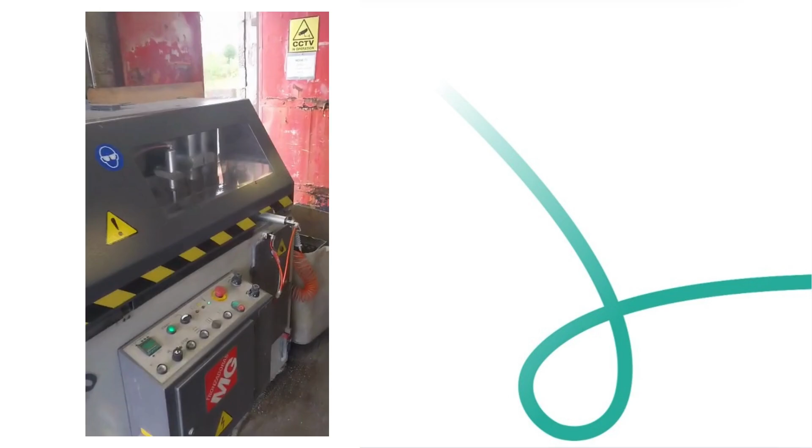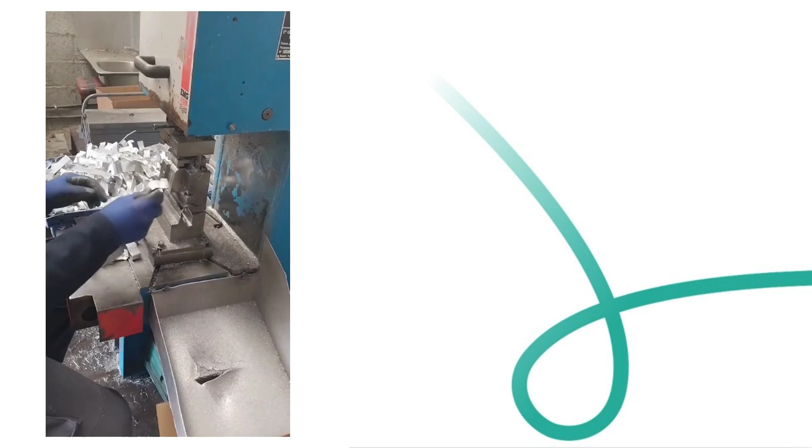The AIM team investigated the viability of automating various processes throughout the production facility and found the punching process was the most suitable application for robotic integration within the factory, as it is highly labour intensive and well suited to automation due to its repetitive and structured nature. The video illustrates the existing workflow where the bracket is initially cut and deposited into a container. This container is subsequently moved to the punching station where the brackets undergo the punching operation. The finished parts are then placed into a designated container via a chute.

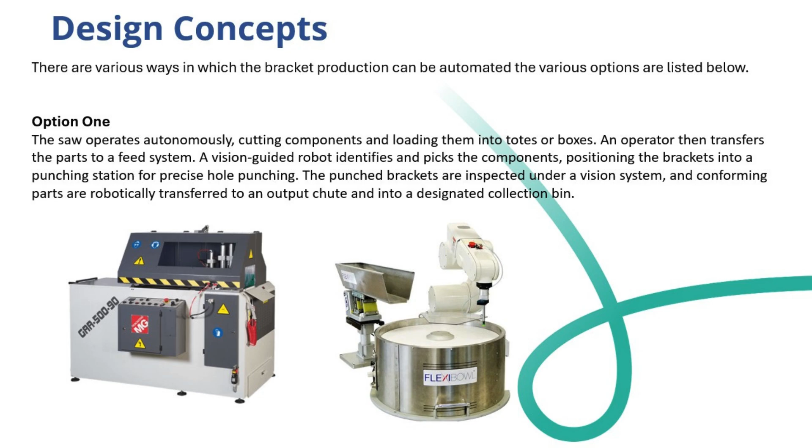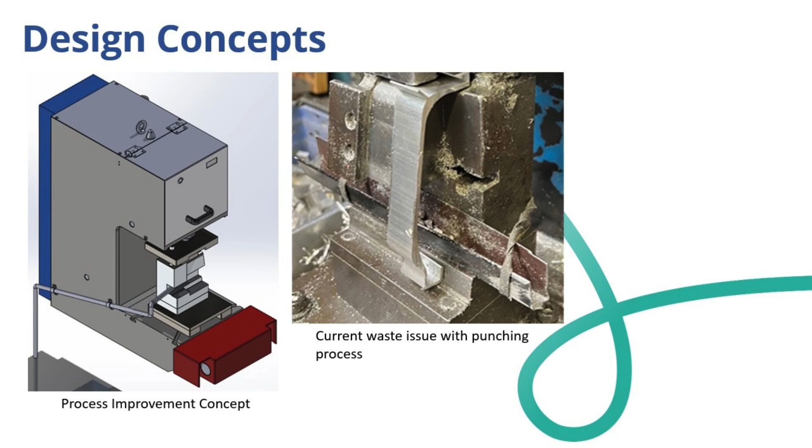A range of design concepts were explored, and research was conducted into new technologies and systems to identify the most cost-effective solution. Various part feeding options were assessed to determine the most suitable approach for the application. The AIM team evaluated the current process and developed several improvement concepts. The images highlight the issue of material waste in the punching operation, with the image on the left illustrating one of the proposed solutions. Enhancements to the cutting process were assessed to minimize material waste and improve product quality. This included the integration of air blast systems to effectively remove residual debris from the saw area, therefore preventing dimensional inaccuracies in bracket widths caused by material buildup.

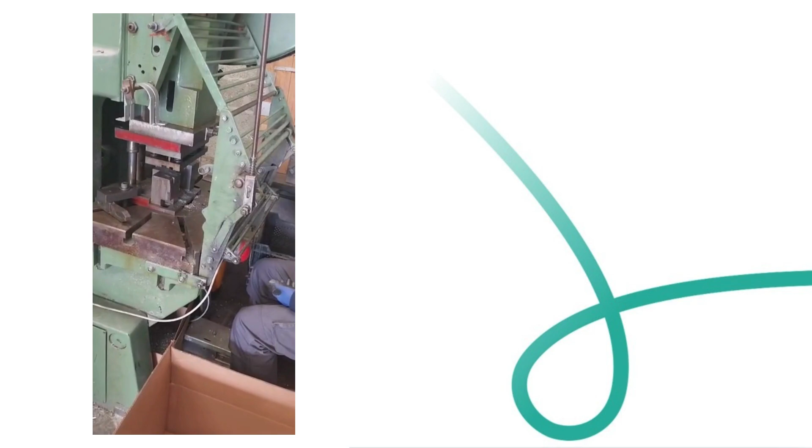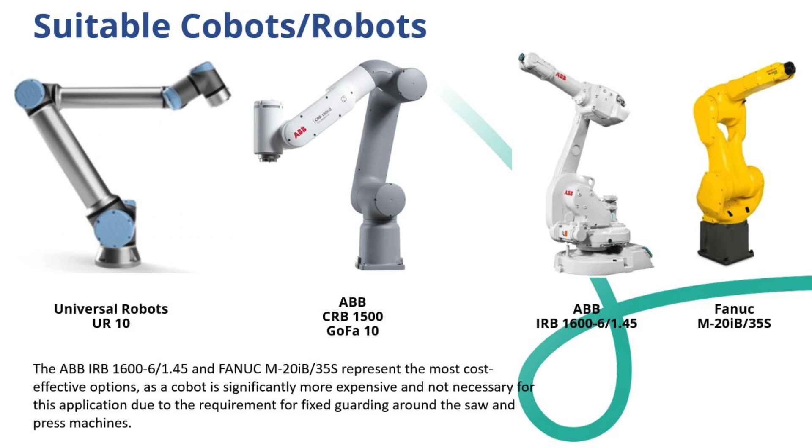Additionally, the implementation of automated material feeding systems was explored to facilitate continuous, unattended machine operation over extended periods, enhancing overall efficiency and reducing manual intervention. Given the average payload is under 500 grams, the robots and cobots listed above have more than sufficient capacity. However, the required reach exceeds 1.4 meters, making a robot more suitable than a cobot due to its lower overall cost. Additionally, since the saw and press machines will require guarding, it's more practical to enclose the entire setup with a robot. End-of-arm tooling options for the robot were evaluated to determine the most efficient and application-appropriate solution.

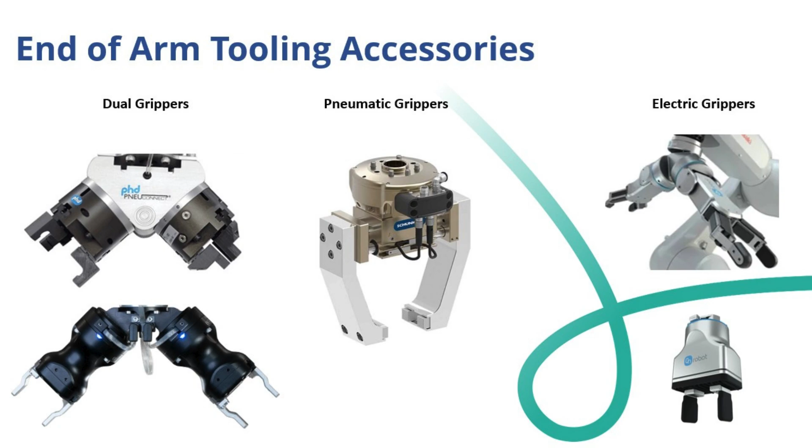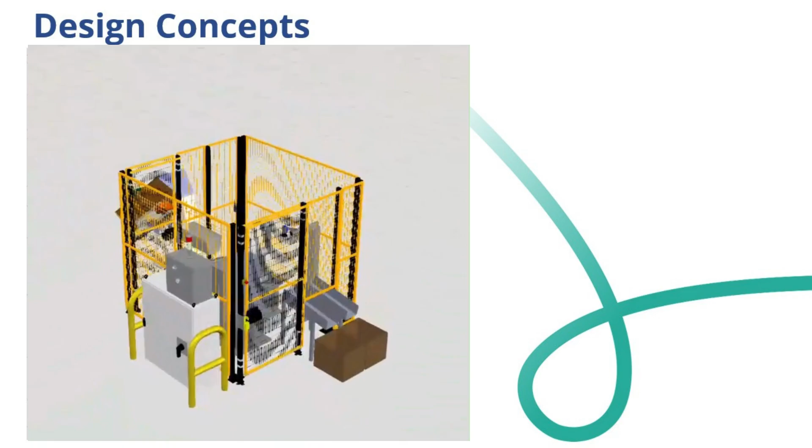Multiple design concepts were developed and evaluated, with the presented CAD model representing the proposed solution identified as the most cost-effective and operationally beneficial for the company. This video demonstrates the initial design concept developed by the AIM team. It features a parts feeder that supplies cut brackets to the robot for punching, allowing the saw and punch to operate independently. The operator only needs to refill the parts hopper every few hours. However, this approach is relatively complex and costly.

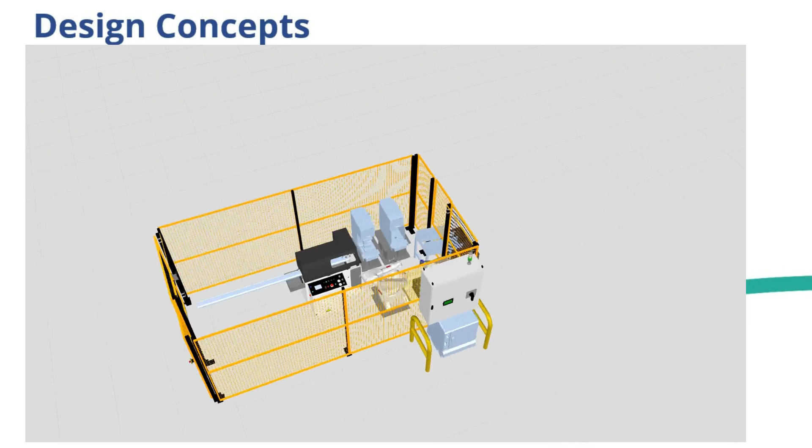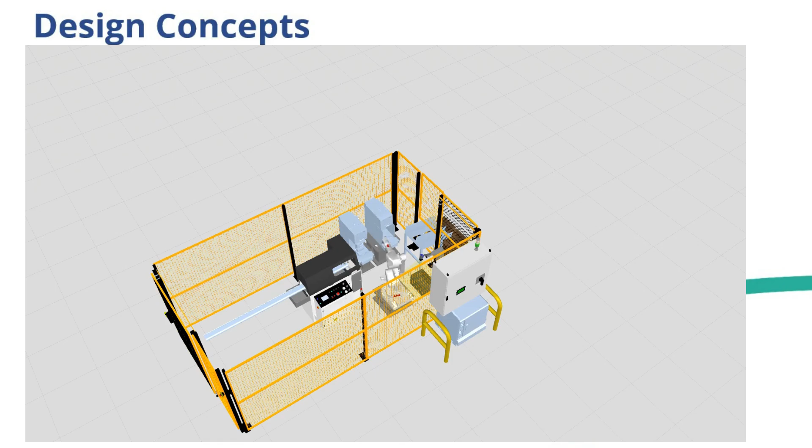This video demonstrates the proposed design concept, considered the most suitable for the company's needs. In this setup, the robot grips the part directly at the saw before it is released by the vise, ensuring consistent and accurate picking. The part is then transferred to the punching station for hole punching, followed by a vision inspection station. Once inspected, the finished part is placed on a chute and directed into a box. The solution is highly cost-effective, as the company already possesses most of the required equipment, except for the robot, guarding, and related components. The AIM team conducted a detailed cost analysis for the project, breaking it down to individual equipment expenses and calculating its return on investment. With support from the local enterprise office, the team also helped the company identify relevant grants available for this system.

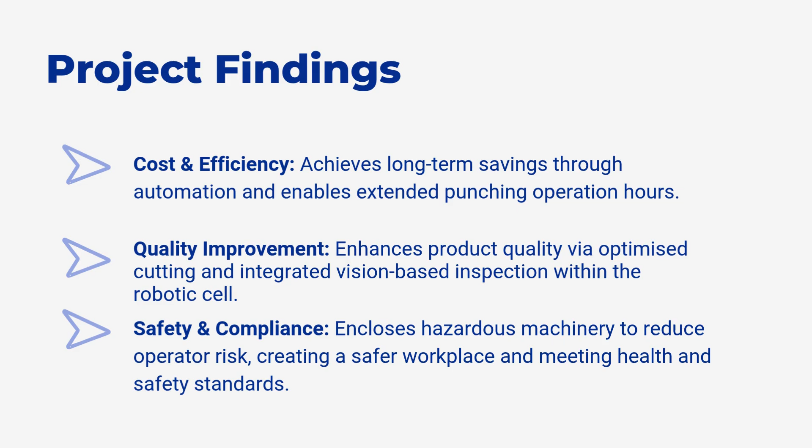The long-term cost advantages of the proposed solution include substantial savings through automation, enabling extended operational hours for the punching process. Additionally, the system enhances product quality by optimizing the cutting operation and integrating a vision-based inspection station with the robotic cell. The proposed system also mitigates safety risks by enclosing both the punch and saw within the robotic cell, thereby eliminating operator exposure to pinch points, sharp objects, and other potential hazards. This design promotes a safer working environment and ensures compliance with relevant occupational health and safety standards. Thank you for taking the time to watch our RoboDemo video.